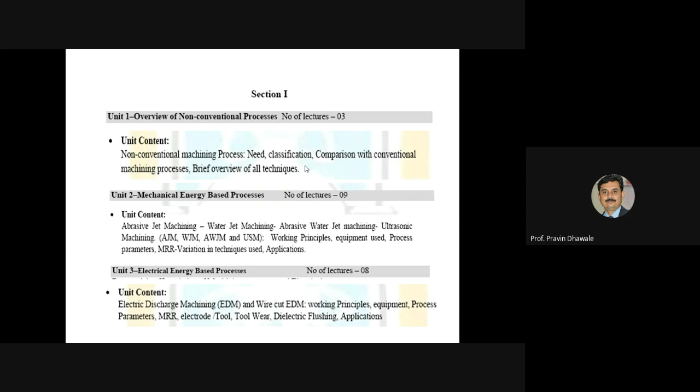As far as the first section is concerned, there are three units, and we have covered all these three units in detail. Let's look at the overview of non-conventional processes. There we see mechanical energy based process and electrical energy based process.

Now, one section is to be considered. Again there will be three units. We have covered unit four and unit five. Only the sixth unit is remaining.

In the fourth unit, we have studied chemical and electrochemical energy based processes in detail. In the last lecture, we discussed MCT, which is based on thermal energy. Till now, we have covered all five units in detail, along with the MCT discussion and by conducting a test on MCT.

Now, the last unit, unit number 6, is the introduction to coating technology. That is very important. There is some introduction, but it only requires 4 lectures. If you consider the content of this unit, we must know the principle of coating technology.

We have to study how this mechanism is conducted, and what are the different methods of coating technology, chemical and physical. We also have to discuss the application of coating technology. Another subtype of coating technology is metallic coating, which may include metal spray and plasma flame.

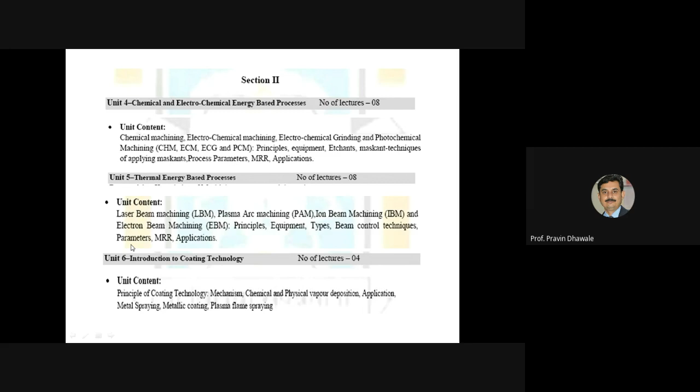Now, today we will cover the basic concept including the coating technology, that is the surface engineering. As far as the introduction to coating technology is concerned, we must know about surface engineering.

Now, what is surface engineering? If you go through this process, you may come to know what do you mean by surface engineering. It is a sub branch of material science that gives information about the surfaces of solids. As we know, solids are nothing but composed of bulk material, and that material is covered by different layers of surface. The surface which bounds the bulk material is called the surface phase.

If you are considering surface phase or surface engineering, solid, as we know, consists of bulk material that is covered by the surface, and that surface which bounds the bulk material is called the surface phase. The surface phase of the solid interacts with the surrounding environment, and this interaction can degrade the surface phase over time.

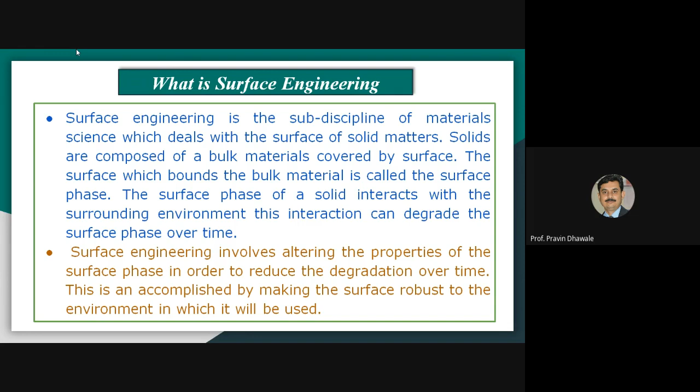Surface engineering refers to the wide range of technology in order to modify the different properties of the surfaces of metallic as well as non-metallic components for the decorative, that is aesthetic, or functional purpose.

That process is called surface engineering. It also includes improving corrosion and wear resistance to extend component life and make the component more visually attractive, giving special properties such as lubricity enhancement and non-stick surface. That is also possible by using this surface engineering.

There is one definition regarding surface engineering given by Bellis: surface engineering is nothing but the application of traditional and innovative surface technology to the engineering component and material with properties unattainable in either the base metal or surface material. That is, surface engineering is the process by which we can provide certain coating over the metallic surface without disturbing the properties of the base metal as well as the surface metal.

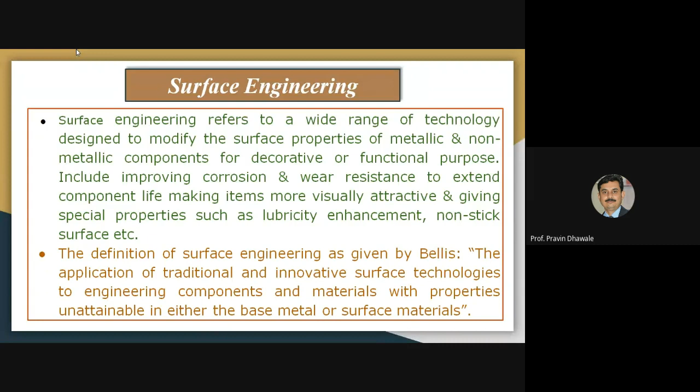Now, how can we define this surface engineering? Surface engineering is used to make changes in the surface of the material. What is the purpose of surface engineering? To gain or improve upon the desired surface properties of the material. It also helps to improve the component's performance, its service life, and mainly its look, that is the aesthetic and economic consideration.

So surface engineering is one kind of process. There are many processes for modifying the surface properties. This can be grouped into three categories, which we will discuss later. First of all, write about the definition, purpose, and type of surface engineering.

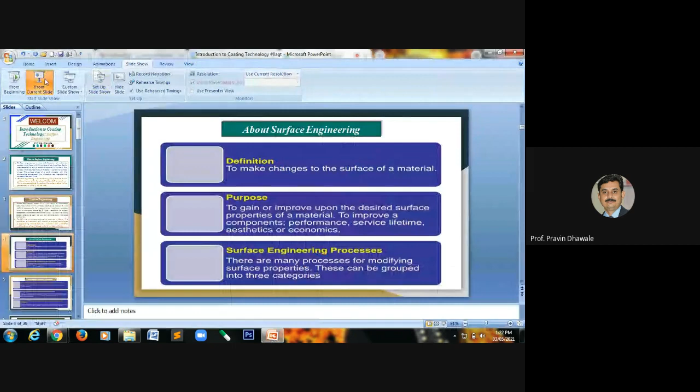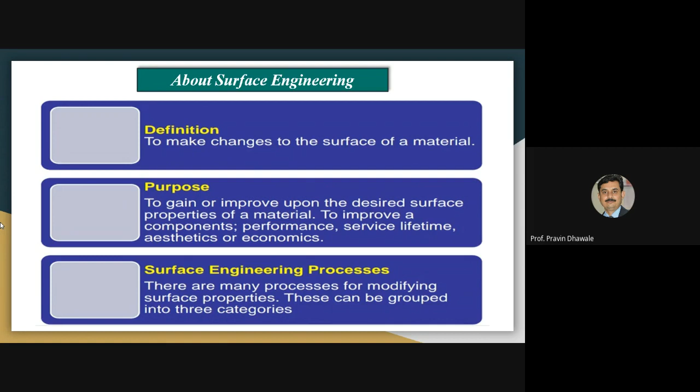Okay, next, surface engineering is the process by which we can modify the surface without changing the chemical properties of that material. Such kinds of changes can be made by thermal, mechanical, or altering the metallurgy or surface texture using this surface engineering process.

If you consider modification by altering the chemistry of the surfaces, such a process involves diffusion of new elements into the surface of the original substrate material, which plays an active part in the modified surface. That substrate material is nothing but the base material over which we are providing certain coating using different techniques.

The surface modification can also be achieved by adding new material on the surface, which is called coating. Such processes essentially add new material to the surface as a coating and do not involve the substrate material constituents at the surface. That is, surface modification can be achieved by providing another material on the base material, which is called coating.

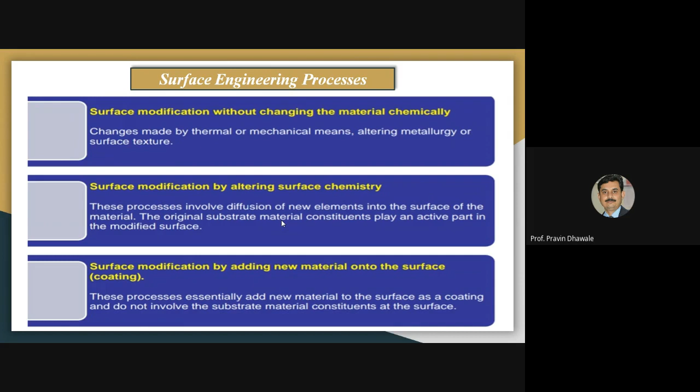The major types we have to discuss are PVD, that is physical vapor deposition, by which we can provide coating over the surface, and also CVD, that is chemical vapor deposition. Then we may achieve coating by painting, spin coating, powder coating, and cladding. These are some of the methods by which we can modify the surface by adding another new material, which comes under the category of coating.

As far as our syllabus is concerned, we must focus on PVD, that is physical vapor deposition, CVD, that is chemical vapor deposition, and thermal spraying. Write down these different types of coating and how they will be achieved.

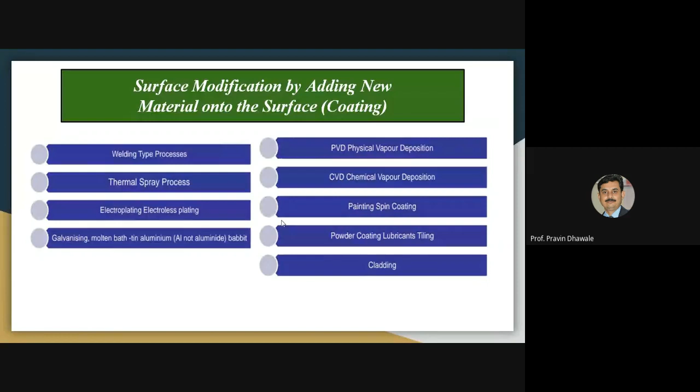Okay, is it over? Next, the first part, that is the principle of coating technology.

Coating technology is a part of surface engineering, also called nanostructuring. It is used mainly to increase the life of the product. Also, it helps to provide a glaze or aesthetic, attractive look to the part by providing certain metal coating over the base material.

By providing the metal coating, we can get better surface finish on the base material. Such coating technology is widely used in industries like appliances manufacturing, automobile industry, telecommunication industry, electronics industry, jewelry, and aerospace industry.

We can use the principle of coating. It may be by metallic coating or metal spray. We will discuss it later. Write down this point: principle of coating technology.

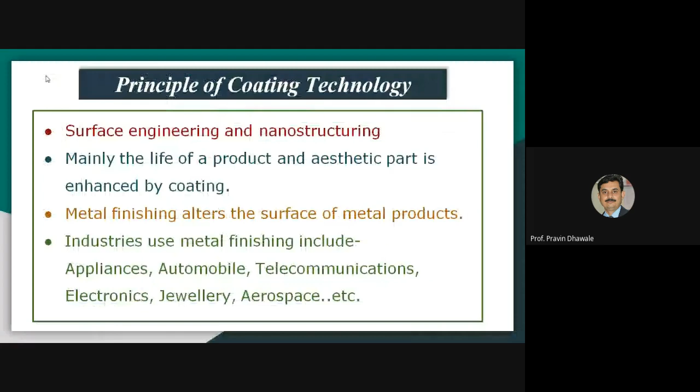Next part. This slide will focus on the process of surface coating, where structure is to be used and what are the different coating processes.

If structure is to be concerned, we may use single component, multi-component, gradient structure, or multi-layer structure for the surface coating. As for how the coating process is carried out, you may choose chemical process, electrochemical process, thermochemical, thermocoating, vapor deposition, and mechanical coating. These are the structures and processes by which we can provide coating over the workpiece.

As far as mechanical plating is concerned, it consists of fine metallic powder that is cold welded to the metal components without any electricity and heat. That comes under the category of mechanical plating.

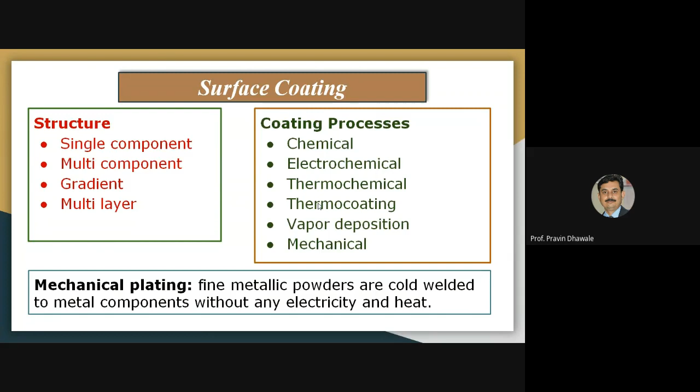Now, surface coating. It is a part of surface engineering. This surface coating is the process that involves the deposition of a layer of molten, semi-molten, or chemical material on the substrate.

Substrate is nothing but the base material over which we have to provide the coating, in order to enhance the life of that base material and to provide a certain aesthetic, good-looking finish to that product.

One of the main functions of surface coating is to modify and reinforce the surface functions, instead of reforming the composition of the bulk material. Bulk material is nothing but the different metallic metals that are part of that substrate; it is called the bulk material.

In this definition, we come to the point that such surface coating process involves depositing a layer of another material, in molten, semi-molten, or by chemical reaction form, on a base material. This coating process is carried out to modify and reinforce the surface functions; it does not involve reforming the composition of the bulk material.

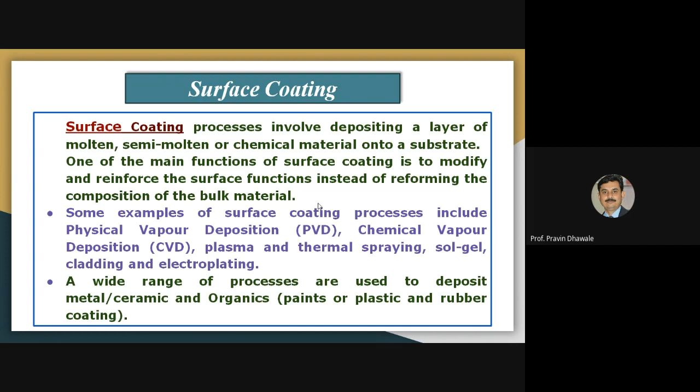Okay, you have written the definition and function of surface coating, and there are certain advantages of this depositing coating. We must also think about the advanced methods used in the surface coating process, that is thermal spraying, sol gel technique, and PVD, which we have discussed earlier.

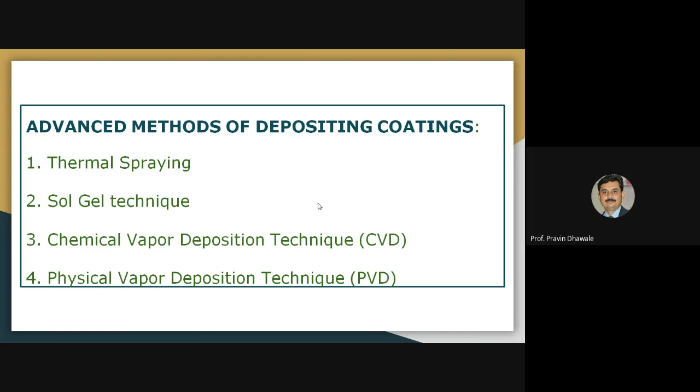As far as thermal, or plasma spraying is concerned, in the last chapter we studied different machining processes that come under thermal energy based processes, including plasma machining. This plasma is a gas generated at high temperature, and it produces heat, which meets with the thermal energy used in this coating process, that is thermal and plasma spray.

If you observe the diagram of the plasma spray process, here this is the water used for maintaining the temperature of this cup. This is the cathode, this is the anode, and we are supplying argon gas or hydrogen gas to this line, this torch, generating the plasma. An arc is produced, and in this arc we pour fine metallic powder along with this arc. This powder comes in contact with the high temperature plasma jet, which is near about 20,000 degrees centigrade, or 10,000 degrees.

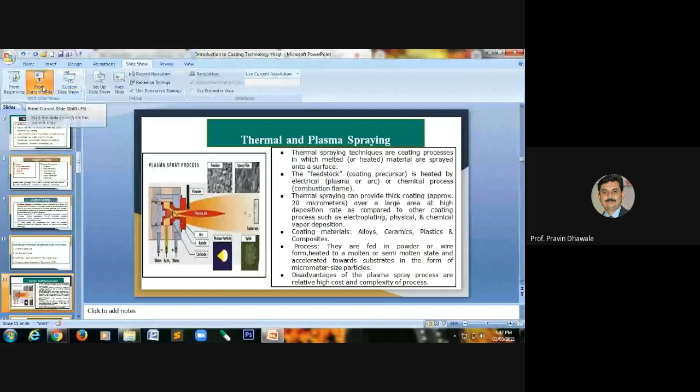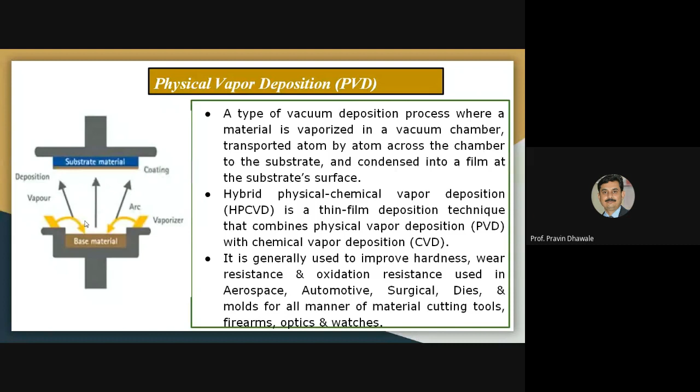Now we go regarding the CVD. Before that, there will be one example of this PVD process. When metal is heated in a vacuum, it becomes a gas and forms a metal film on the object to be plated.

Here is the vacuum chamber. Here we are providing this metal. We are heating this metal so that vapors of this metal are formed, and due to the vacuum, that vapor gets deposited on this plate. So this plate gets provided with a thin metallic coating.

This is the example. Certain semiconductor devices such as thin film solar panels, aluminized PET film for food packing and bulbs, and coated cutting tools for metalworking.

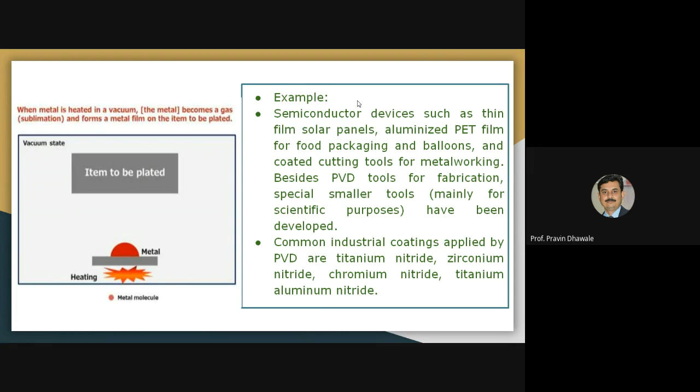Besides PVD tools for fabrication, special smaller tools have been developed using this PVD process. There are certain common industrial coatings applied by PVD, like titanium nitride, zirconium nitride, chromium nitride, and titanium aluminum nitride. These are certain metallic coatings provided on a workpiece using this PVD process.

Chemical vapor deposition is a chemical process used to produce high quality, high performance solid material. This process is often used in the semiconductor industry to produce thin films of metal.

In a typical chemical vapor deposition process, the substrate over which we have to form the coating is exposed to one or more volatile precursors which react or may decompose on the substrate surface to produce the desired deposit. Frequently, volatile byproducts are also produced which are removed by the gas flowing through the reaction chamber.

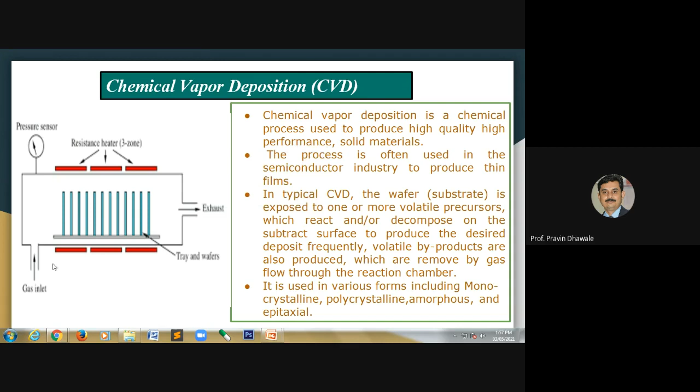Okay, we will stop over here. If you have any doubt, in the next lecture we will start with one of these methods from this coating technology in detail. Thank you, thank you very much. We will stop over here.

Vita, are you there? Avinash, Unkaras, do you have any problem? Please ask. Shweta, are you there? Shweta, roll number 6. Avinash, is my voice audible? Okay, we'll stop here.